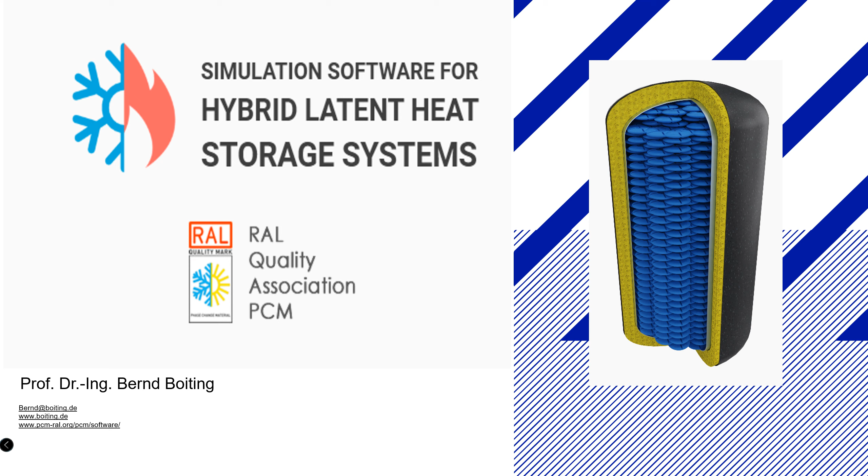The program is currently in a beta release stage and is continuously being developed. As the simulation foundations of this program allow extrapolation to any unvalidated storage systems, no guarantee or liability is assumed for damages arising directly or indirectly from the application of this demo.

At the University of Applied Sciences Münster, extensive laboratory investigations were conducted with various phase change materials in different PCM objects. The data obtained from these experiments serve as a foundation database for calculation parameters within the calculation algorithm of the software.

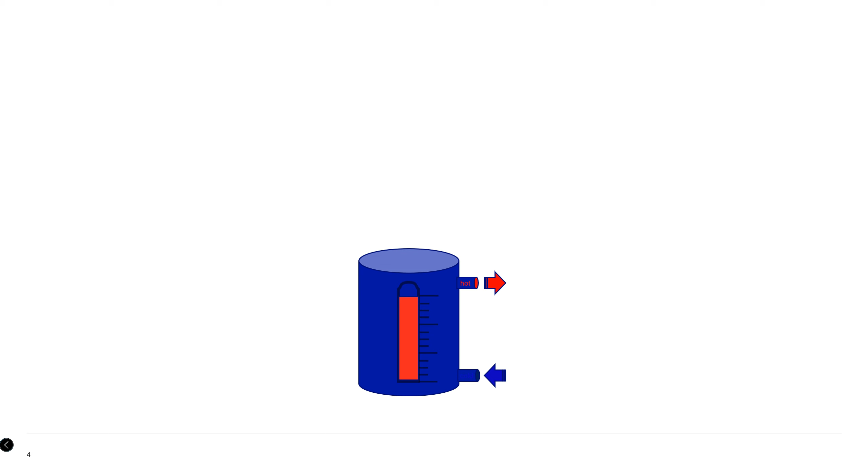Renewable energies are primarily generated in the form of electricity. Therefore, when considering energy storage, one naturally thinks of electric storage first. However, if you consider that a significant portion of overall primary energy demand is used for heating and air conditioning in our residential, non-residential buildings and industrial processes, thermal storage often makes more sense.

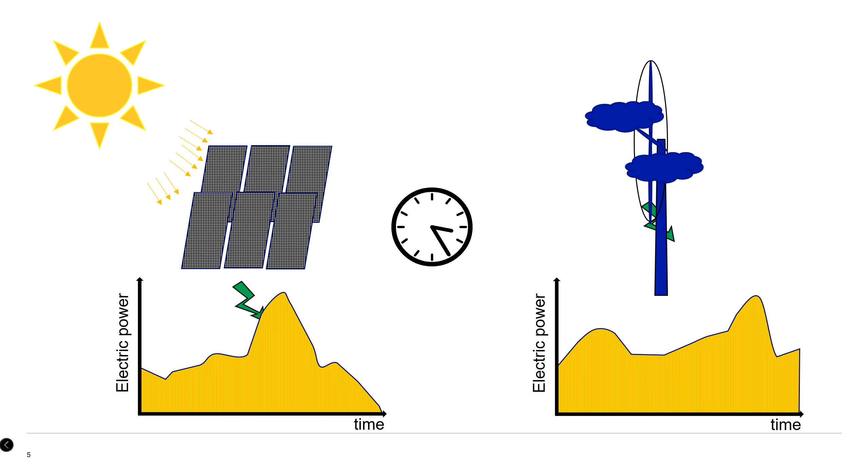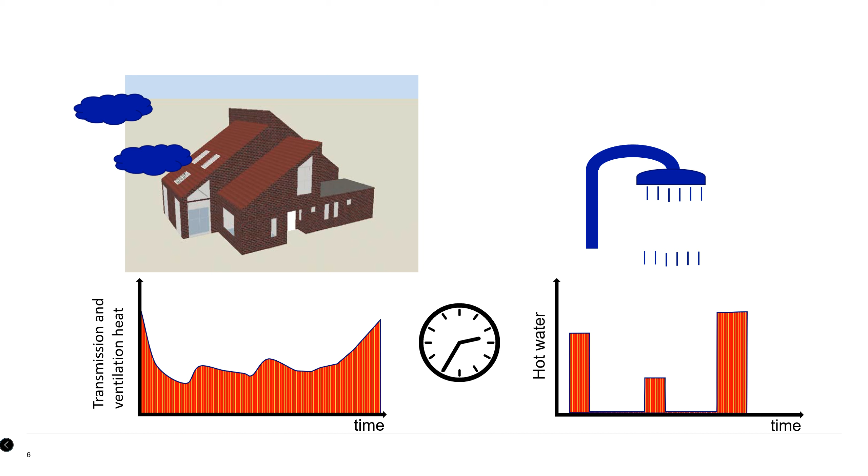Let's first take a look at our renewable energy sources. Wind and photovoltaically generated electricity is volatile and often occurs outside of normal usage hours. It would be beneficial if this energy could be stored for later thermal use. Similarly unpredictable is the demand side. The demand for heating, cooling, and domestic hot water or thermal process energy often distributes stochastically throughout the day.

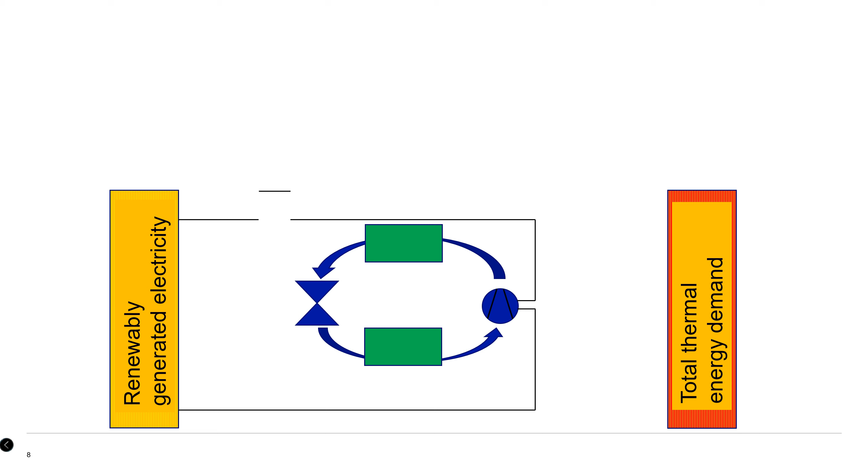When cumulating the energy demand, ideally the cumulated stored renewable energy meets the demand. Now a system is sought that efficiently converts the renewable electricity into heat and cold. The compression refrigeration machine, also known as heat pump, is the ideal choice here, providing both. The challenge lies in the required large storage and the decreasing efficiency of the machine with storage temperature.

By upgrading the storage with phase change materials, they become much smaller, as the storage capacity can be almost tripled depending on the application. Since PCM can absorb very large amounts of thermal energy during the phase change at a constant temperature, the efficiency of the compression refrigeration machine increases again.

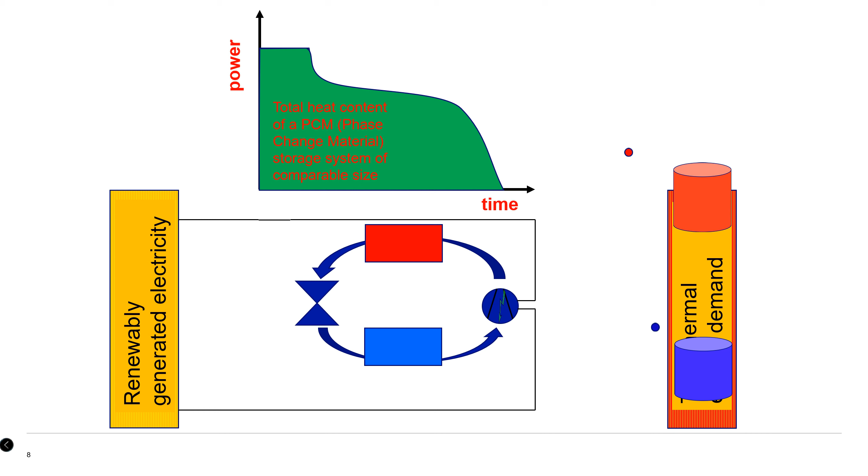If this system is integrated into residential, non-residential buildings or production processes, it allows the direct storage of locally, regionally, or nationally generated renewable energy in the thermal storage system through external control, such as that of an energy supply company. This enables the buildings or processes to heat and cool autonomously over a defined period.

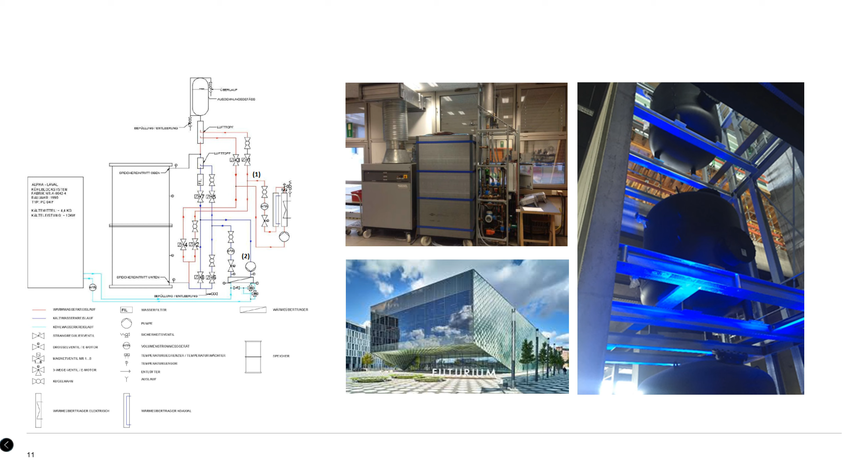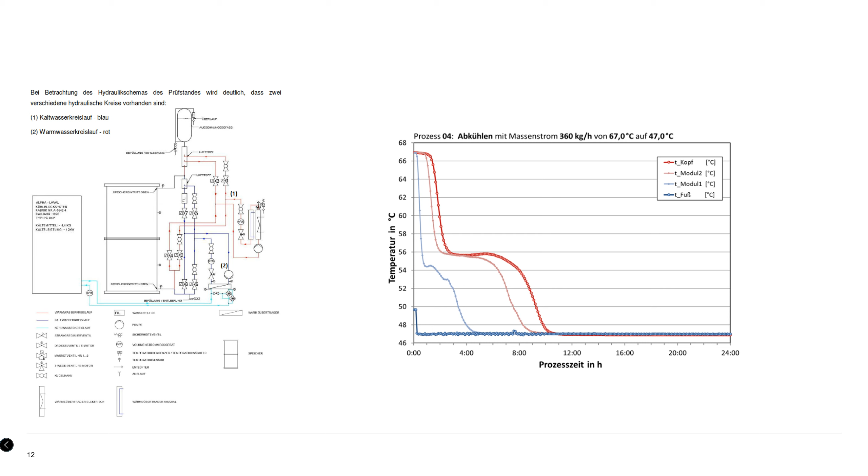All PCM data stored in the program database for simulations adheres to the specifications of the RAL Quality Association. The phase transition temperatures and the precise enthalpies of phase transitions were represented in accordance with the RAL Quality Mark 896. For more information, visit the homepage of the RAL Quality Association.